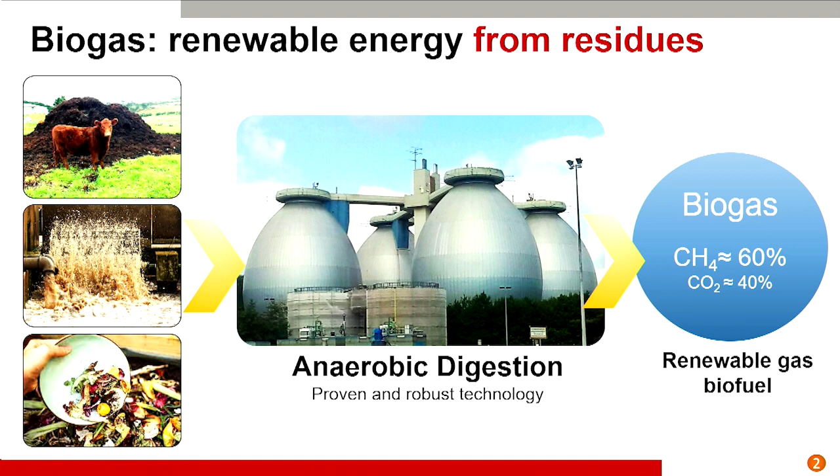Well, the team. We have talked a lot about biogas and renewable energy. I will not spend much time on this. We can produce biogas from a wide range of organic residues. And then we have biogas, which is mainly composed of methane and CO2. So one of the key applications of biogas is to use it directly, burn it in engines and combined heat and power systems, such as this one. And we can generate electrical and thermal power.

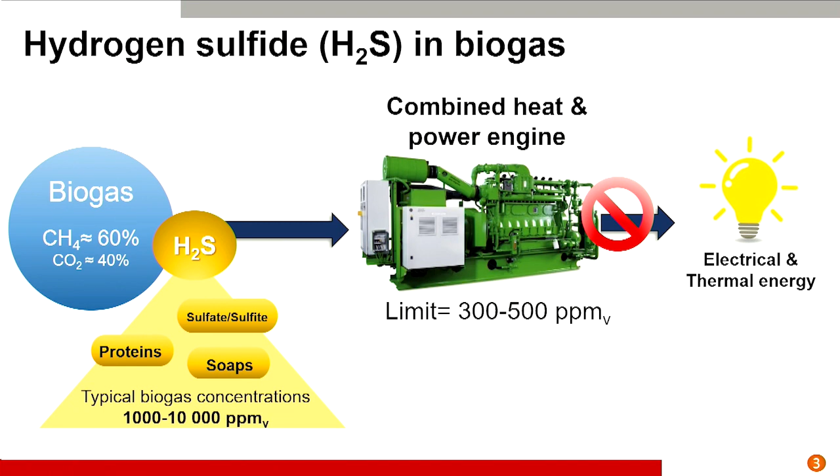But raw biogas is never ready to use. We also have to apply some technologies to purify it. Sometimes we have to enrich it, but usually purification is mandatory. In this case, for H2S, H2S can be in very different concentrations. You can find 1,000, 5,000. We have measured even 20,000 ppm of H2S, which is a huge 2% of the biogas. So it will destroy your equipment in a few weeks if you burn biogas in this way.

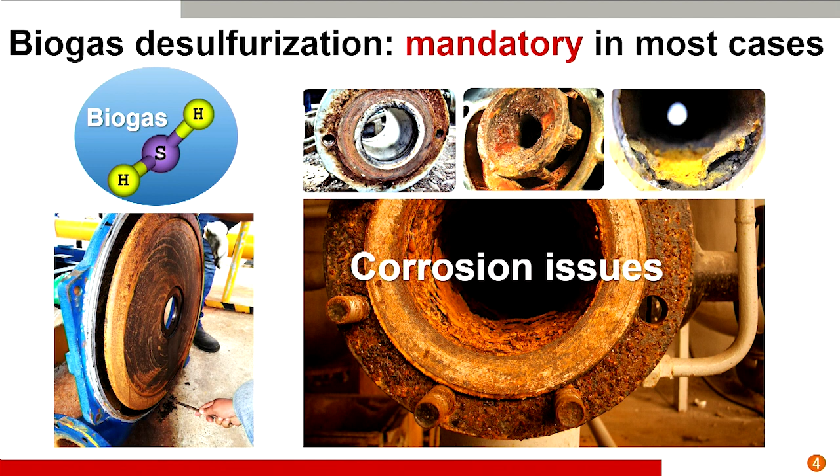So we have to perform a desulfurization of this biogas. The problem is very simple, it's corrosion. You can destroy the engine, but also the pipes, if they are metal pipes. So this is the problem. There are a lot of biological desulfurization technologies. You can use bacteria, aerobic, anoxic, but this is a very interesting one because we can combine wastewater treatment performed by microalgae and bacteria, and you can hang up the desulfurization system.

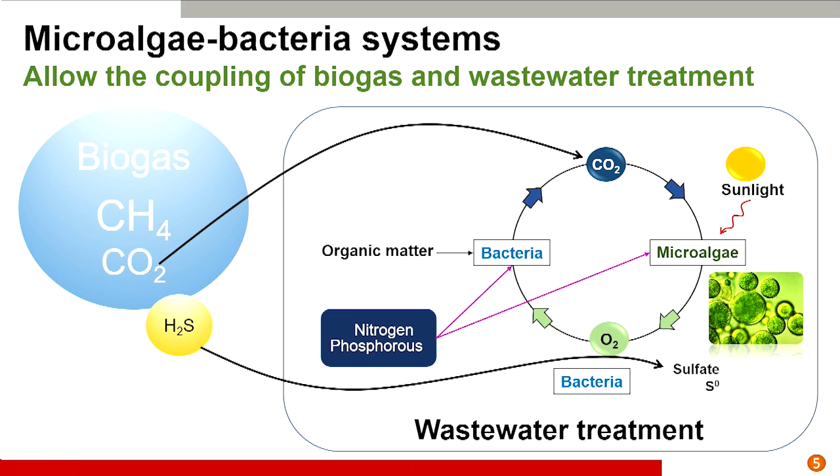So the process is very simple. You have bacteria consuming organic matter, producing CO2, which is used by microalgae to produce oxygen, and the cycle goes on. So this treatment is very cheap, because it's driven by sunlight. It's a very good low-cost alternative for wastewater treatment. And you only hang up your absorption unit, so you can enter this system very quickly. And the H2S can be converted into sulfate or elemental sulfur, depending on what you want. Elemental sulfur can be valorized as well.

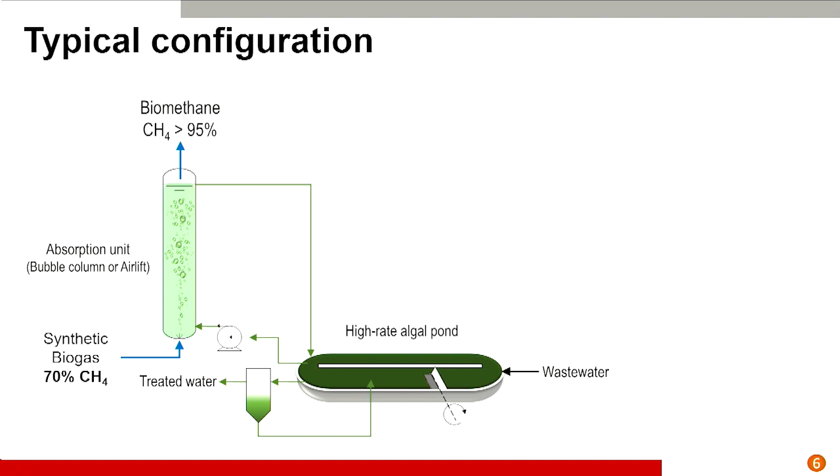So this is the typical configuration of a biogas purification and upgrading system. This is a conventional high-rate algal pond. Many of you know these systems. And then you are recirculating the liquid media, and you perform here the biogas purification. The idea is to absorb CO2 and H2S, so you have an enriched stream, which we call biomethane. So the key objective of this technology is to produce biomethane. If you make a literature review, you will see that this is the key objective.

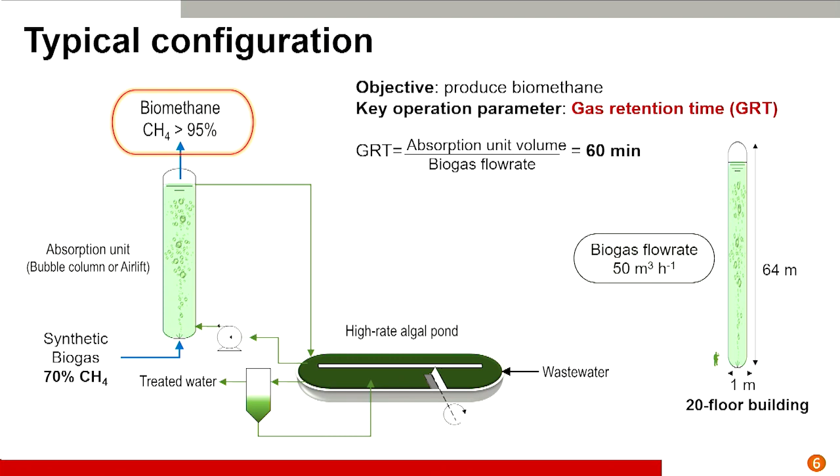And the key operating parameter for biogas purification and upgrading is the biogas retention time, or gas retention time in general. It is a very simple relationship, comparable to hydraulic retention time, but in this case for the biogas. The most typical GRT value in the literature is around 60 minutes, 1 hour. But if you calculate what kind of absorption unit, a bubble column for instance, you will have with this GRT, it is huge. It's like a 20-floor building. So it is impossible to implement this in real life, so we have to do something. Sometimes we only stay in this step and we don't think about what equipment we will need to perform this process.

So the goals of this work are two, very simple: to determine the H2S removal capacity of a compact absorption unit operated at shorter gas retention times, and determine if calorific value enhancement can be achieved under such short gas retention times, but, I underline, under a realistic biogas composition, because this is another problem.

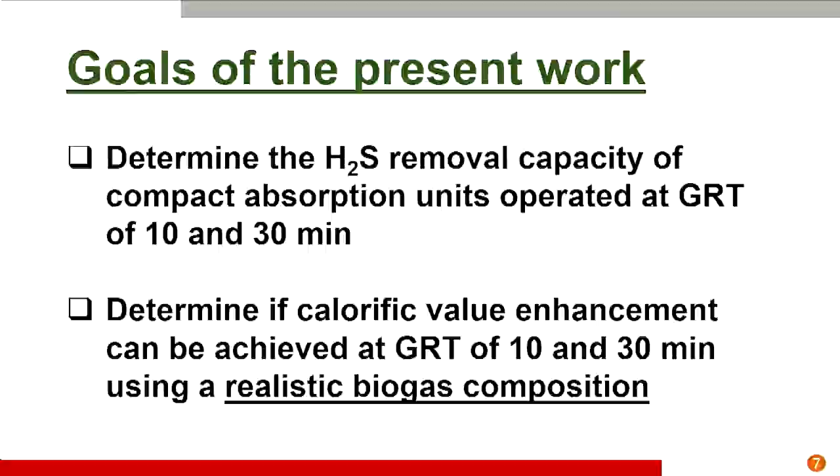If you review the papers published on this matter, you will see always that the synthetic biogas mixture used in the experiments is composed of methane 70%, which is not very realistic. If you measure in real life, the biogas, in the best cases, is 50, 60%. So starting these experiments with 70% is not very realistic.

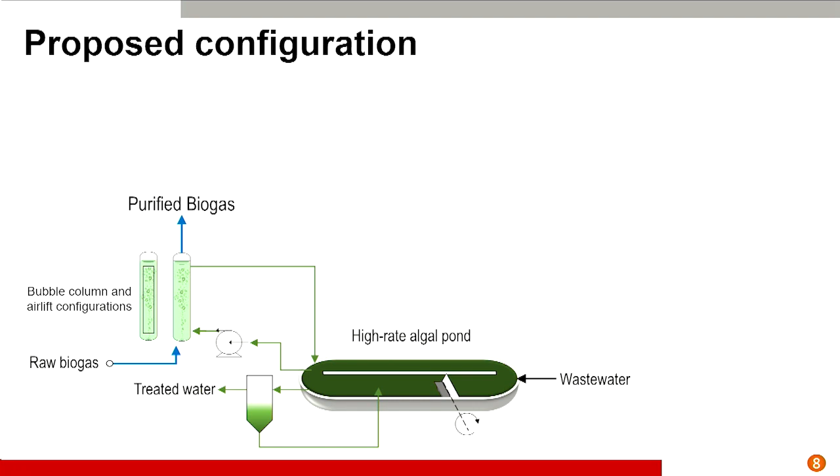So this is the proposed configuration. You see it's much smaller. We tested two configurations, air-lift systems and bubble column, which is the typical one, and exactly the same. Why are we proposing this? Because in many cases you don't need to perform the complete CO2 removal. You only want to clean the biogas so you can burn it and use it in situ to generate energy.

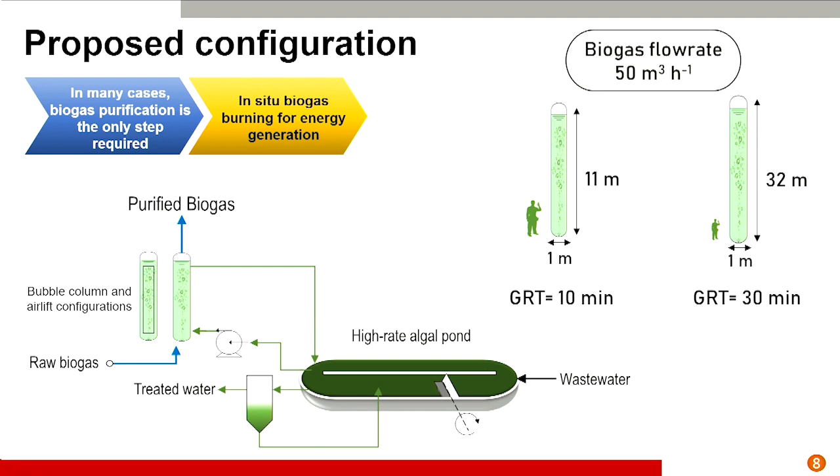So if you use biogas retention times in the absorption module of 30 minutes, you will still have a very high absorption unit, 32 meters. But if you use 10 minutes, you will have something that can be applied. So let's see what happened with this.

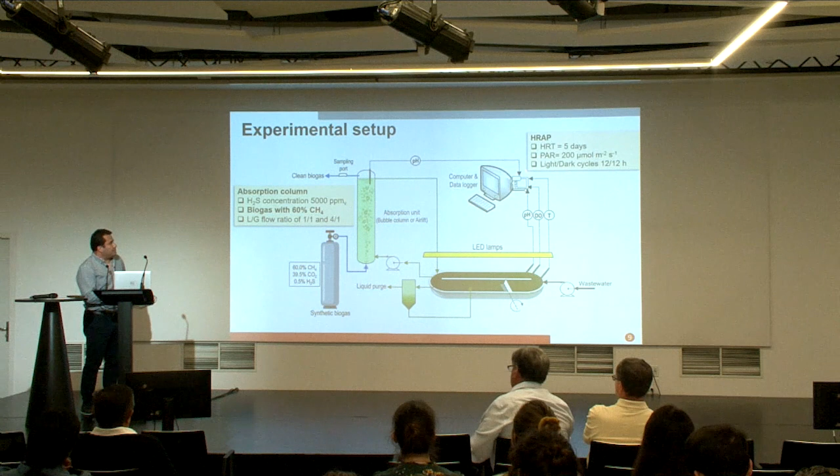So this is the experimental setup. I will not go deep in the description, but the most important thing for us was to try a more realistic synthetic biogas mixture: 60% methane, as can be found. The H2S concentration was 5,000 ppm, which is also a high concentration of H2S. And we tested this relationship, L/G, the liquid recycling rate related to the biogas flow rate in the column, and very conventional operating conditions for the wastewater treatment.

Results: we have a first startup period of 30 days. The first days we operated as a batch to promote the growth of the microalgae community, and then we started the operation in continuous. Both biogas and liquid phase were operated in continuous mode. After this startup period, we started decreasing the biogas retention time to 10 minutes in the air-lift configuration. Here, this line is the initial concentration of methane in the biogas, and this is the initial concentration of CO2. We observed that we increase the methane concentration and we somehow decrease the CO2 concentration.

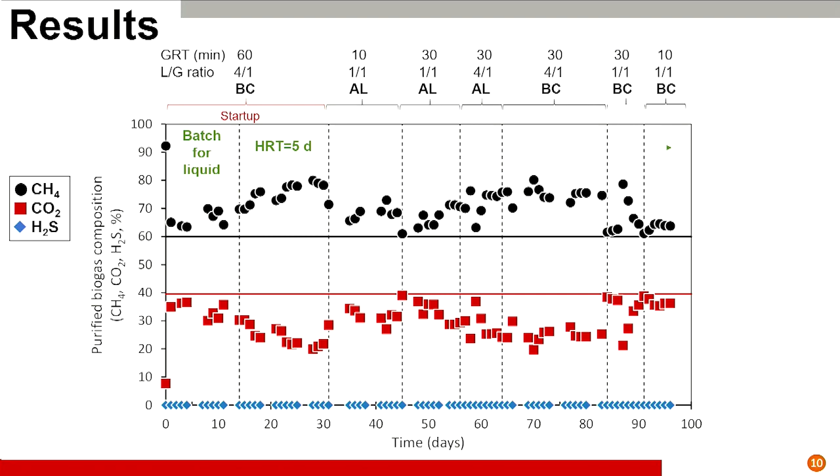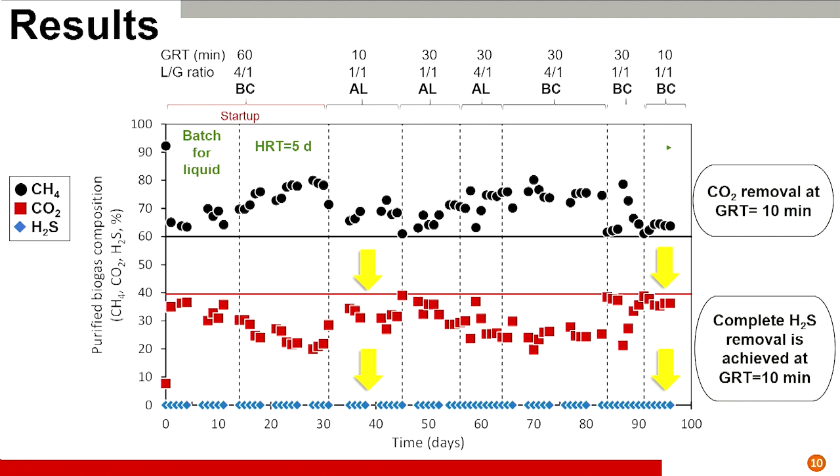So the most important for us was this. The H2S was completely depleted regardless of the gas retention time you use, because H2S is quite soluble and easy to remove. But we were interested in observing if at 10 minutes we obtain good results on CO2 removal. That means that you increase the calorific value of the biogas. So we have some interesting results in such a short gas retention time.

Then we also monitored the dissolved oxygen concentration with an online sensor, and we can see here that even under this short gas retention time, thinking about loading rates of H2S and CO2 in the system, when you increase the H2S a lot, you will need more oxygen for oxidizing the absorbed H2S. So we were very happy because it was not depleted. So you can combine the treatment of very large flows of biogas without depleting the oxygen, so you can treat the wastewater as well.

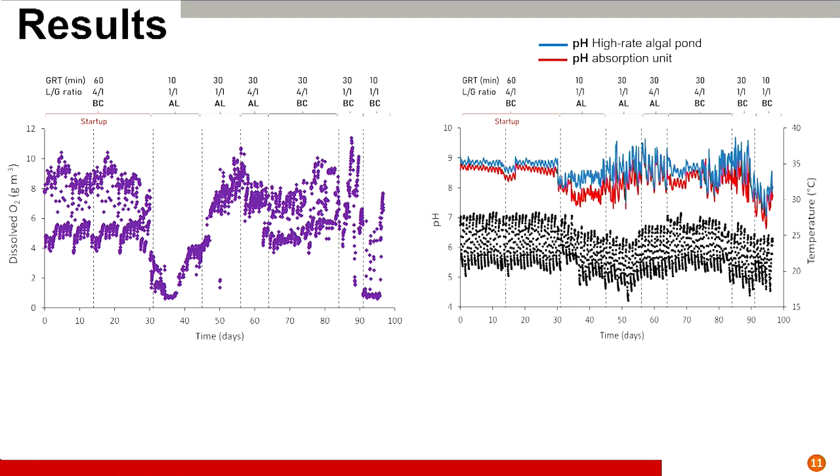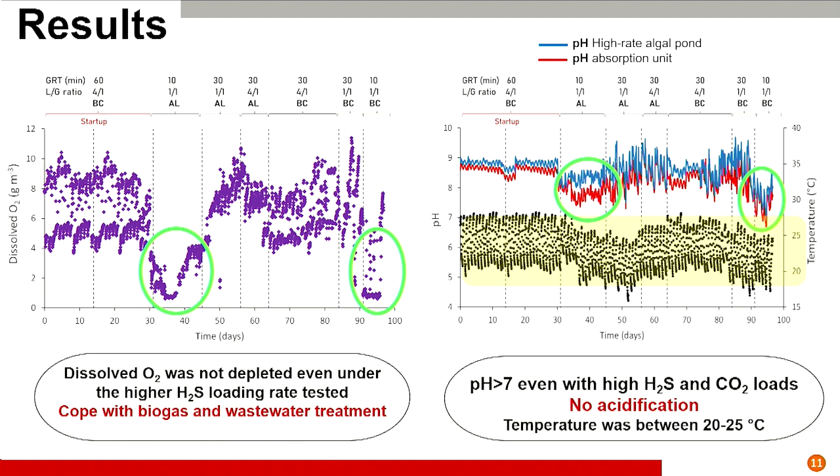It's not compromised. The same observation goes for the pH, because in these cases you have a high load of CO2 and H2S, which are both acidic gases, so the pH will decrease, and we observed in all cases the pH was above 7. So very good news. No acidification.

The main conclusions: complete H2S removal can be achieved with compact absorption units with retention times as short as 10 minutes, so they're very, very small. The biogas calorific value enhancement you can achieve with the bubble column is 5% or less, and with the air-lift configuration almost 15%, which is very considerable. So it was very interesting.